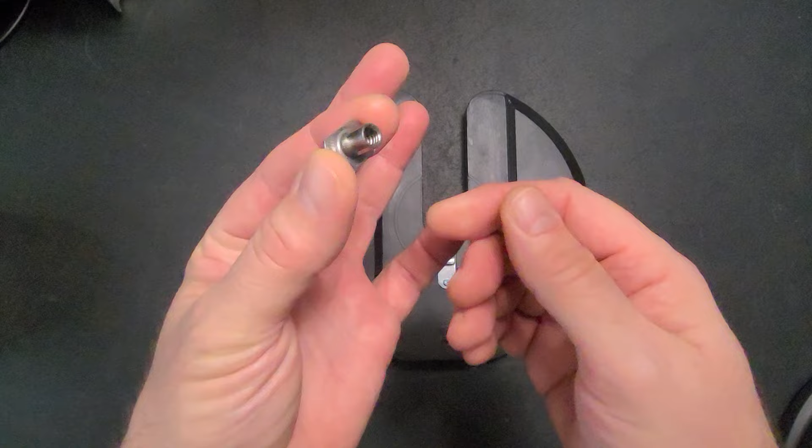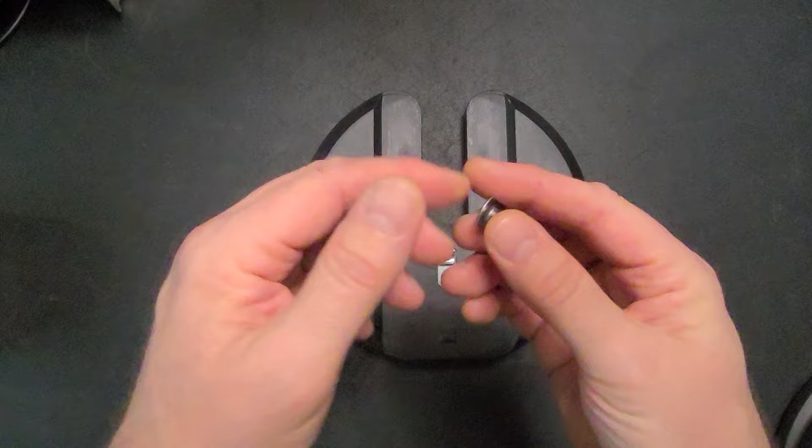And back then I thought I had a really great solution for it, and some people have used it with great success. But a lot of people were having trouble finding a key part of the fix that I had mentioned, and that is this weld nut. You can buy them usually in packages, but it's kind of hard to find them individually. So people had trouble finding these, and that made the fix not as accessible to some people, or they'd have to go spend more money on buying stuff in bulk packages, and they might not need them all.

So I want to show another method in this video. I should have shown it a couple years ago. I didn't, but I'll show it now. And hopefully it is a little bit more convenient and accessible for you guys. And I think you'll like the result better than my other fix.

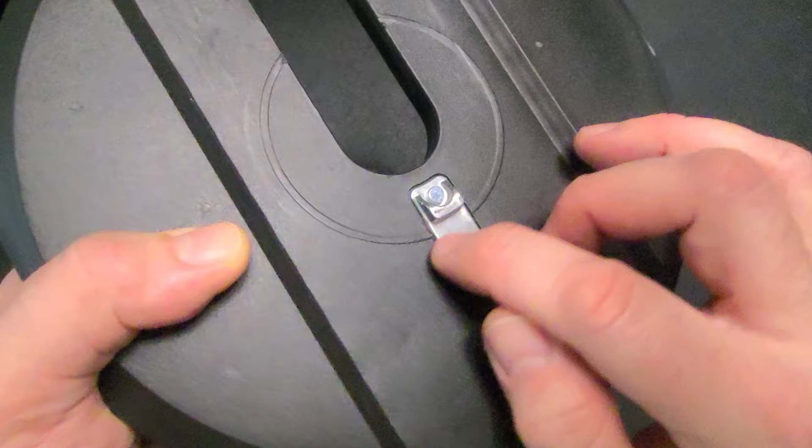But we're talking about how these tabs break on these plates. They're just kind of a cheap cast zinc or something tab. And they crack here. And this piece will usually come off, and you'll end up with pieces like that, where this used to go. Now, when that happens, of course, this tab no longer can hold onto the lip of the disc, right? So the way this works is that is how these plates are held into your dumbbell handle.

So in order to use them safely, you need to fix the tab, and you need a fix that's relatively inexpensive, but it's also very durable. A couple of years ago, I introduced this method. I used a bolt and a weld nut, just like this one. And it's a great solution. I still like it as an overall solution. It works, it's doable, and if you go back and look at that video, you can absolutely use this method if you want to, if you can get your hands on these weld nuts.

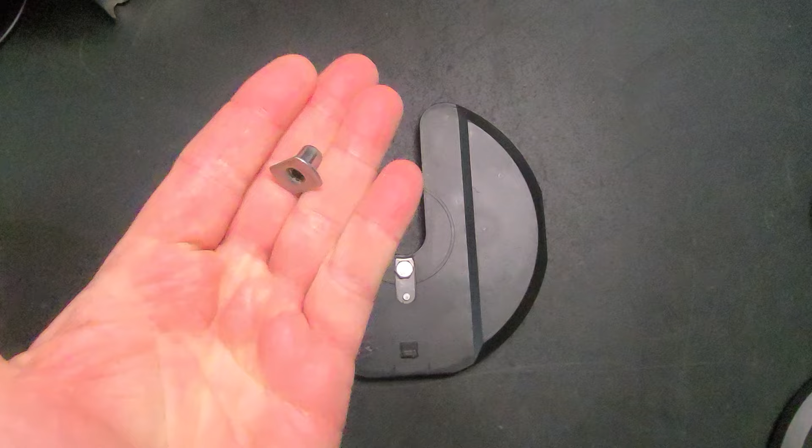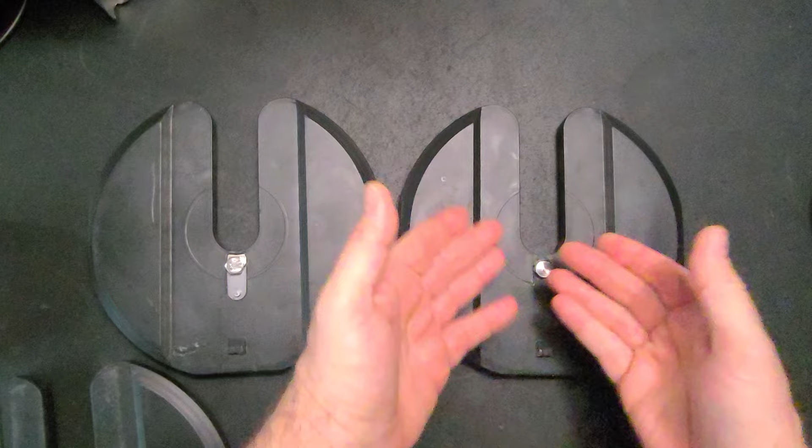But I made refinements, and I'll show you what I think is an even better result. This almost looks like it's a factory tab. And what I've done is I've modified the bolt to round the edges, make it a little bit more smooth. And it's loose in here because I haven't epoxied it into place yet for this video. And then I used an epoxy with pigment to make a filler for this portion of the plate, so that it looks pretty much like a factory plate.

The finish is really nice, and I think that even if your tabs aren't broken yet, this is a really nice mod to do to permanently fix all your tabs. This is not going to break. This is a grade 8 bolt. You're not going to have problems with this bolt. You'll destroy the rest of the dumbbell before you'll break this tab off.

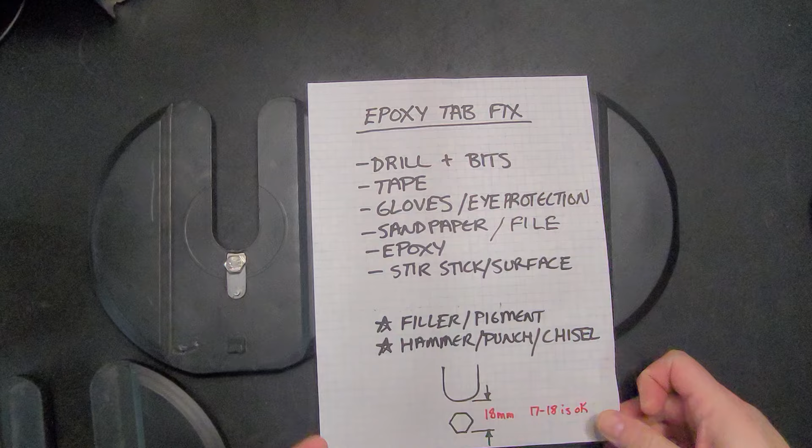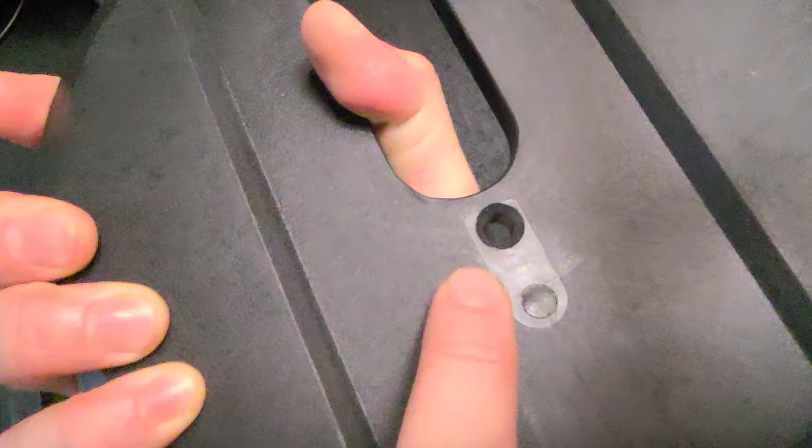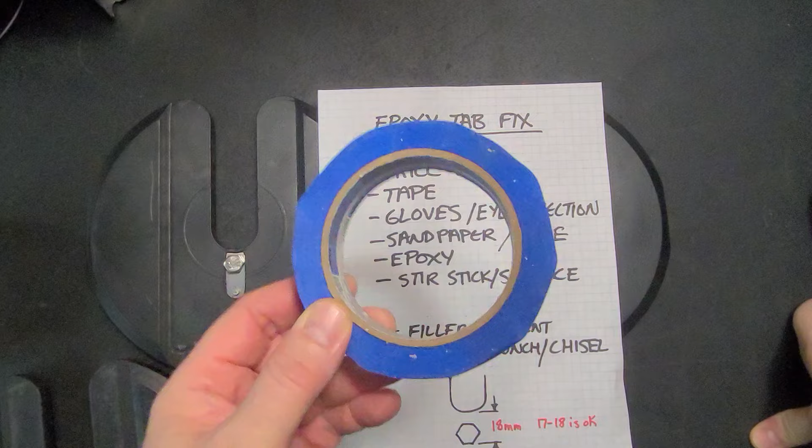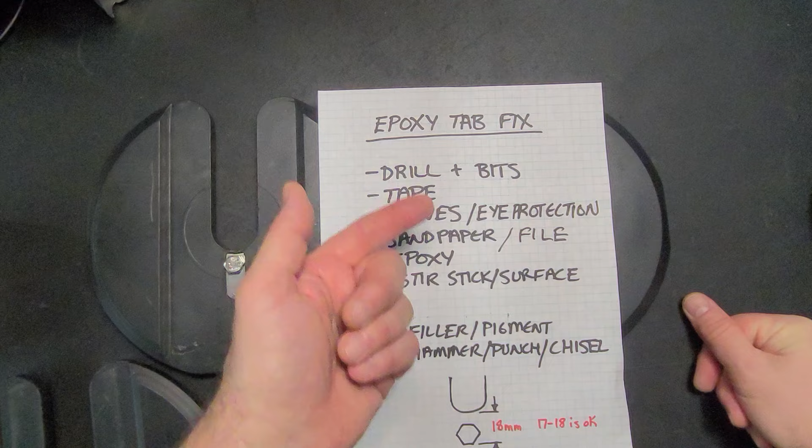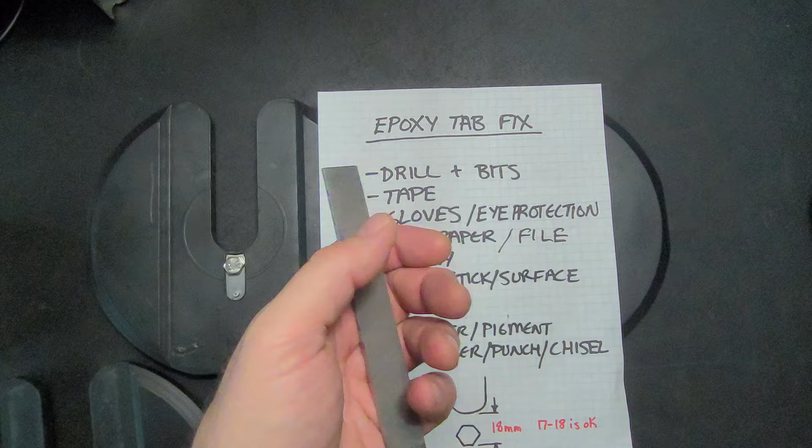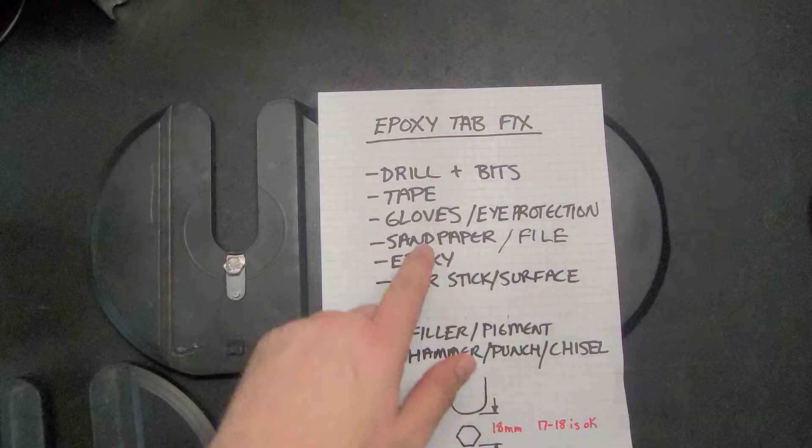And then you're going to need tape. You've seen me use this in many of my videos. I love blue painter's tape. It doesn't leave a residue, so it's perfect for the job. You're going to want some gloves for working with the epoxy, and some eye protection for your drilling. Sandpaper and file. I think this is a 0 file, but 0, 2, they'll work. And then I use something like 600 grit paper for modifying the bolt, and I'll talk about that after.

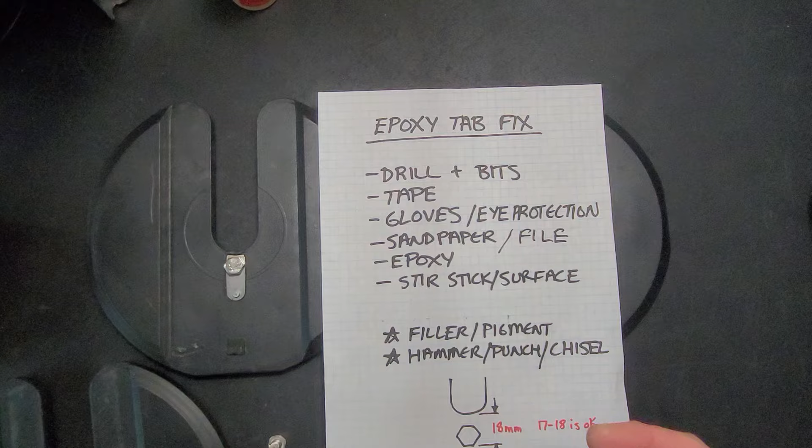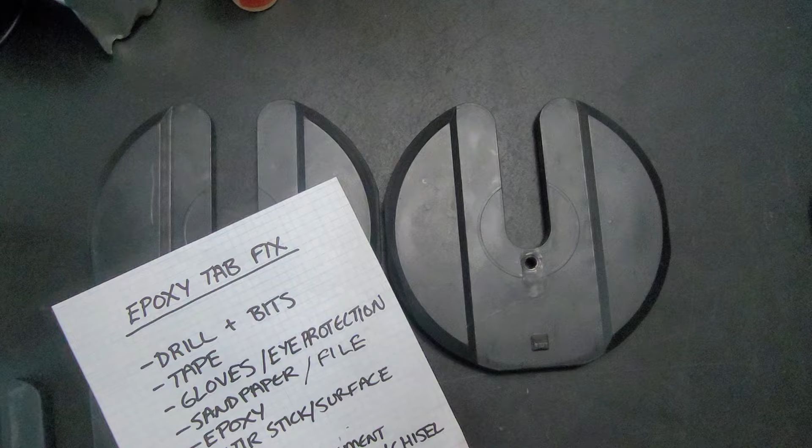And then epoxy, you've seen me use this in other videos. I use a 5-minute cure 2-part epoxy, but there are many out there. You can use a longer cure one if you want. And to color it black, just like in the last video, I use black iron oxide powder. It's perfect pigment. It's cheap too. It's about $10 for this massive bag of it. You won't need that much. I do other projects, so it comes in handy, but it's cheap enough that I keep it on hand as a black pigment. You'll need some sort of stick and something to mix your epoxy.

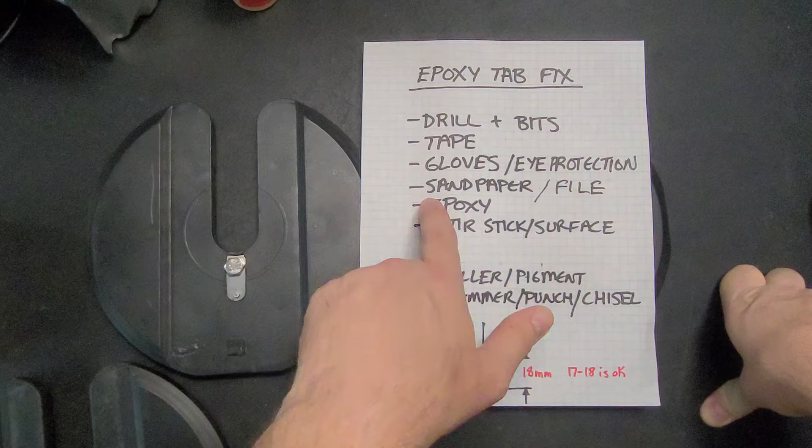Just use something that you can throw away. The filler or pigment is optional. That's why I've got a star here.

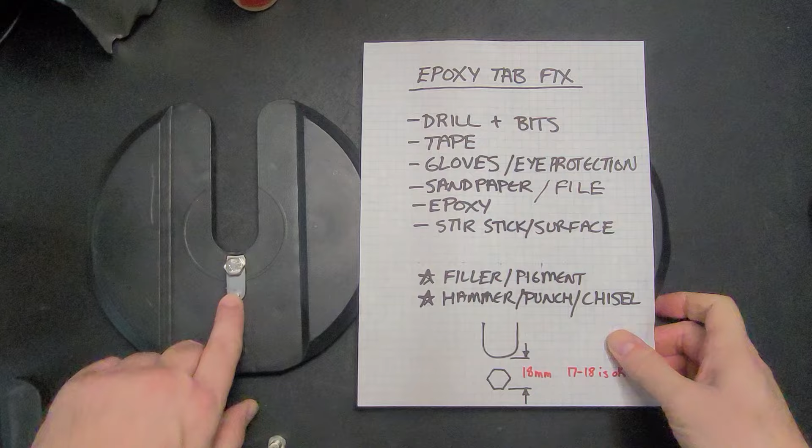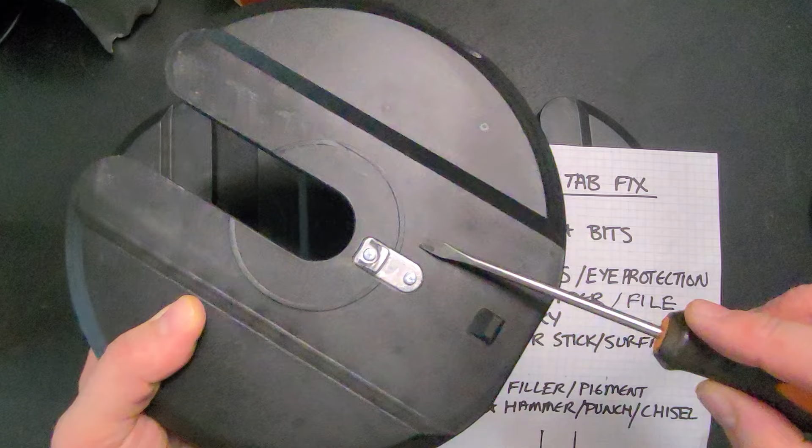And then the hammer and punch and chisel, that all depends on your situation. If you've got rivets that you need to remove, being able to use a chisel to remove that rivet can come in really handy. Or, you're going to ruin your screwdriver if you're doing it, but you could use a screwdriver in a pinch to pop these rivets. So that's it as far as the list.

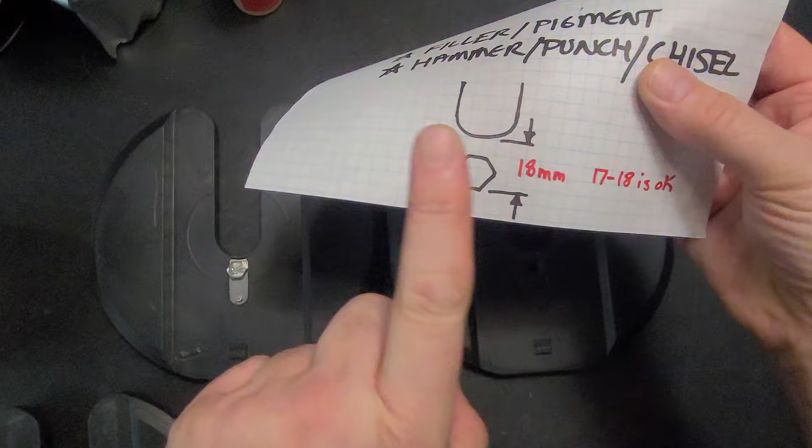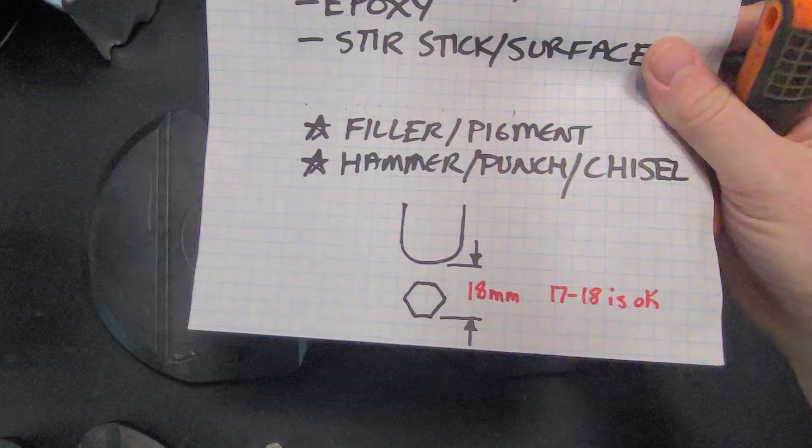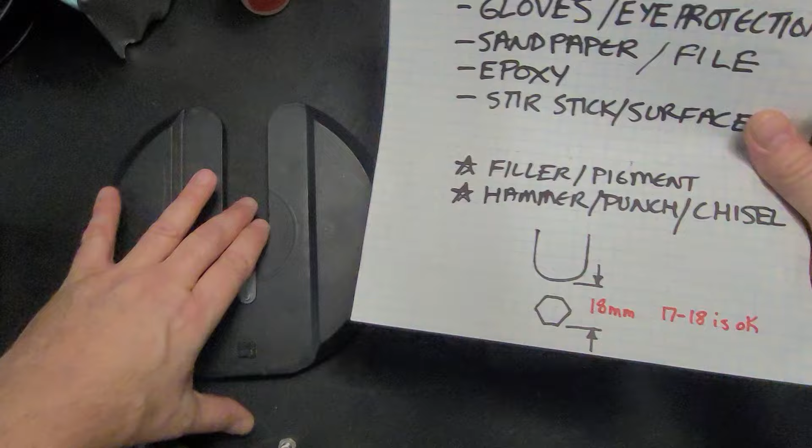And then the one important dimension to understand here is that from here to here is approximately 18 millimeters. So when you put your bolt in, you want the bottom of your bolt to be 17 to 18 millimeters. If it's 17, it's going to be a little bit loose. The plate will be a little bit loose in the handle. If it's 18, it's going to be just about right.

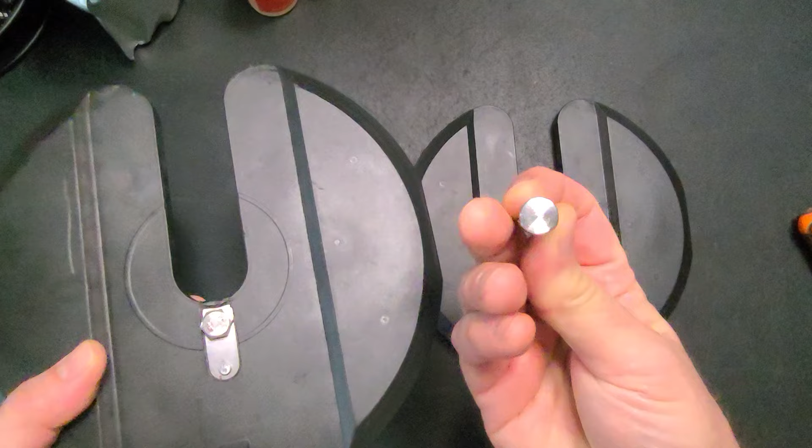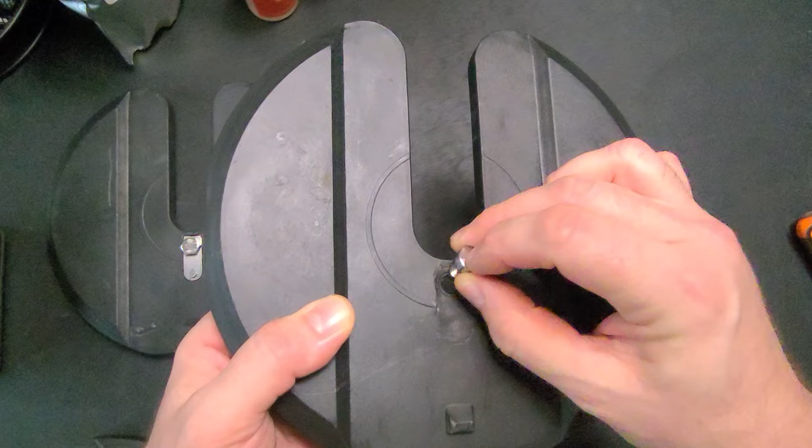And it turns out, and I talked about this in the previous video a couple years ago, that when you use a bolt of this size through the original hole, so this hole here, if you use that hole as your center for drilling, you get the larger hole in that position. When you put your 5/16 or 3/8 inch bolt into that hole,

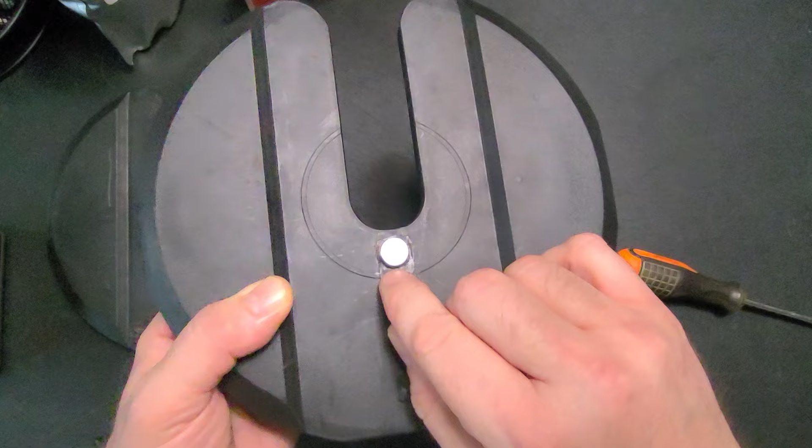as it turns out, this from here to here will be just about right. It'll fall in the 17 to 18 millimeter range, which is what you want. So this hole is perfect as the guide hole for drilling your bigger hole.

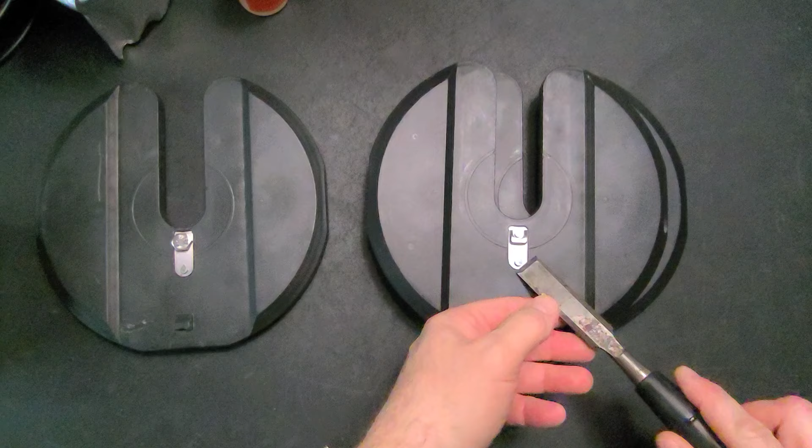Now, how do you do this? The first thing you're going to do is take off the original pieces if they're not broken off already. And again, you can do that with a chisel and hammer. Take off the pieces. You're going to be left with something that looks a bit like this. And I would recommend taking this rivet off. You don't have to, but I would take it off.

But you're going to be left with something like this, where this is the steel now of the plate itself. And then you can see the lip to the plastic covering. This plastic covering is a lip, and it forms a pocket that you can pour your epoxy into.

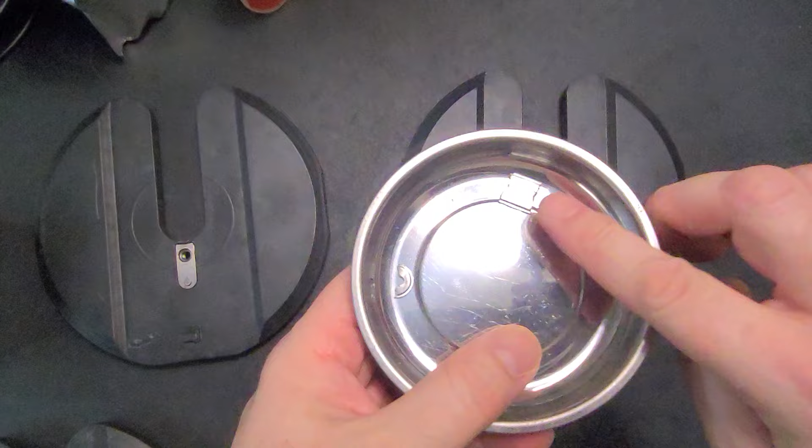Okay, so now that you've got your pieces off, you're going to drill your hole through that original rivet hole, in the correct size so that your bolt can slide. You don't want to have to tap it and screw it in. You want the bolt to slide freely into the hole.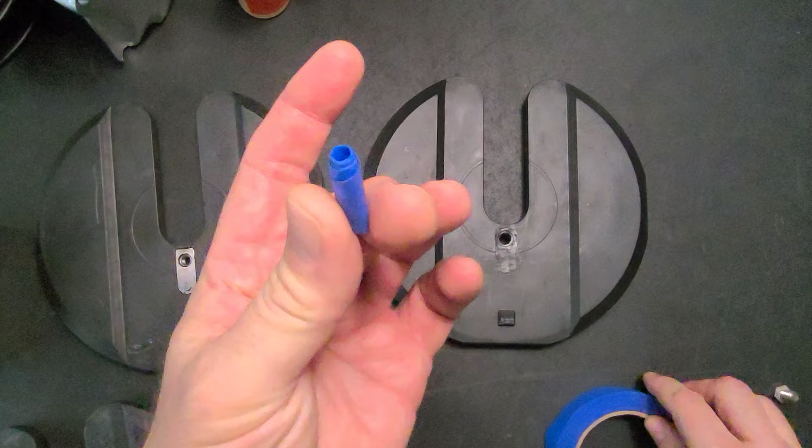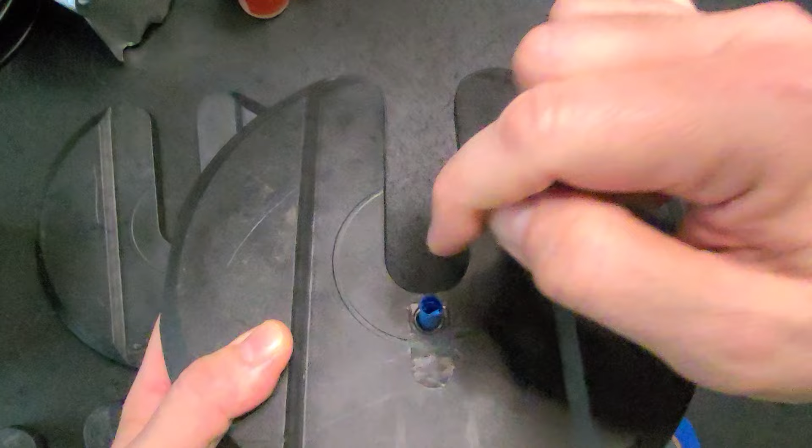Once you've got your hole drilled, the next thing is to grab your tape and roll up a tube that will fit in the hole that you drilled. That will keep the epoxy from going down into the hole when you pour it into here. So basically it'll look like that.

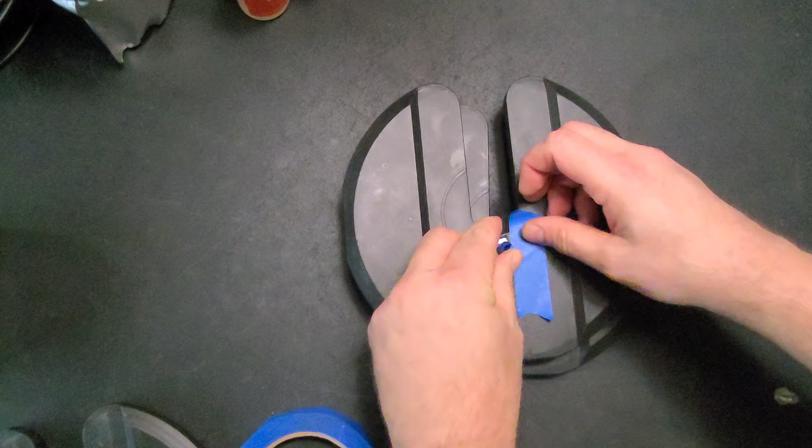Then we'll use this plate since it's got the steel still showing. You're going to put your tape alongside the pocket so that you don't affect the surrounding plastic, okay? You're basically looking to keep epoxy and sandpaper off of the plastic that surrounds the pocket. So basically like that.

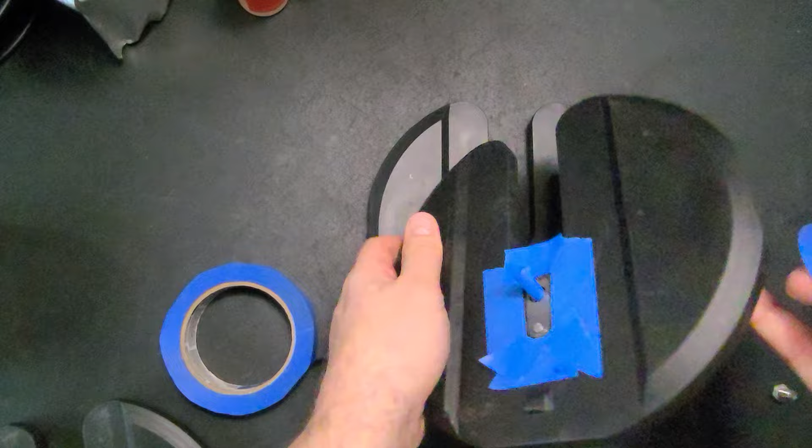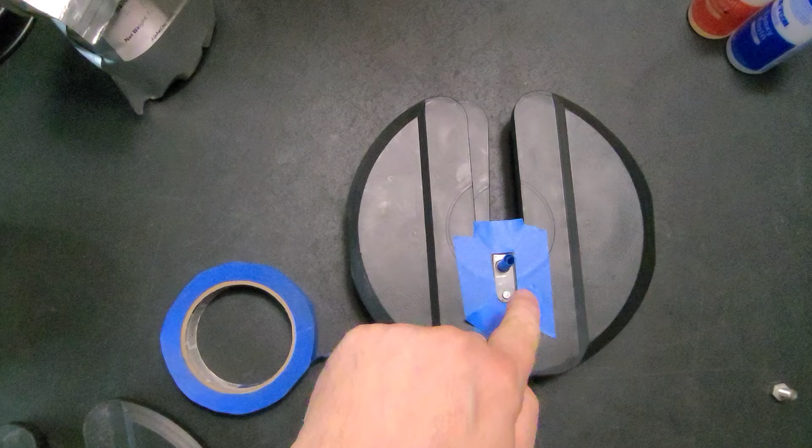Then grab 2 more pieces, and on the back side of the plate you're going to cover the holes that are on the back side. Now you're going to mix up your epoxy, and if you're going to color it with any kind of pigment, you're going to add your pigment filler to your epoxy and pour it into this little pocket that you've created there and let it begin to set up.

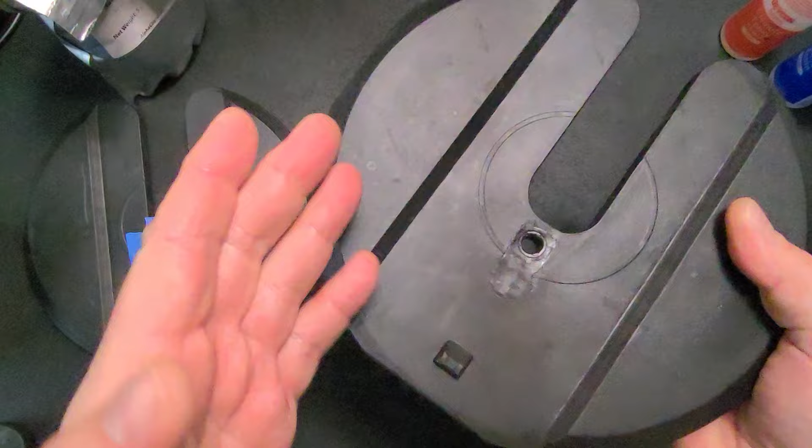Now, because this is 5-minute epoxy, in about 10 minutes or so, the epoxy will be nice and tacky to the touch. It'll feel a little bit sticky when you touch it. And that's perfect, because after you've poured it and it's sitting in there like this, you're going to use your fingers and just kind of push on it so that it takes the shine off of the epoxy, because when you pour it, it's really shiny. By taking off some of the shine, it makes it better match the surrounding plastic.

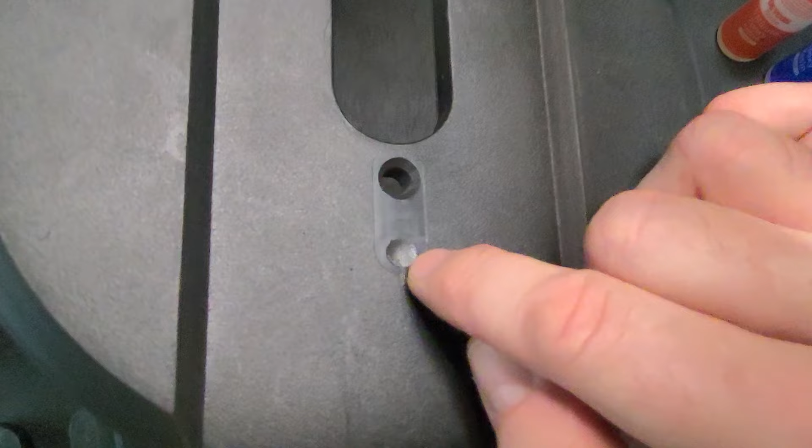And the other thing you're going to notice is that when you pour the epoxy in here, it's going to flow through and fill the hole where that other rivet used to go, which is great. It fills it in beautifully and it looks factory.

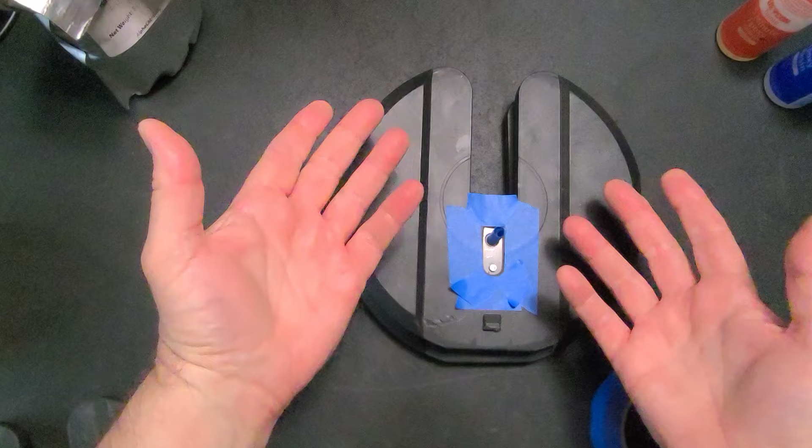So after your epoxy has cured, you can take your tape out. Now, this tape's not necessarily going to come out this easily. It's going to be a little bit stuck to the epoxy. So you're going to have to pull this out and then clean up the hole in here.

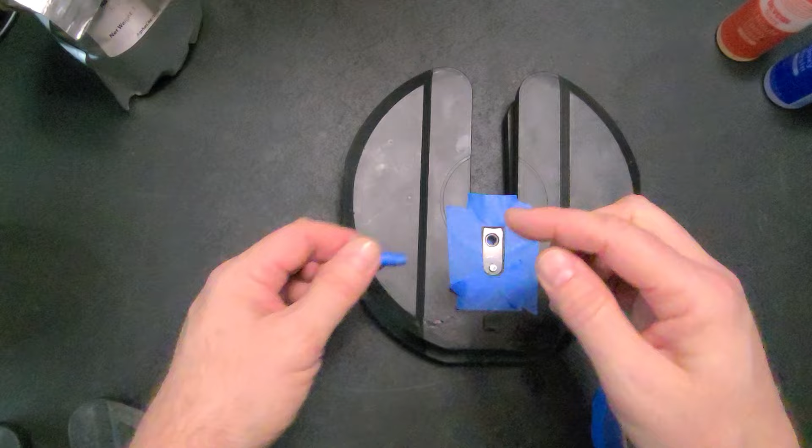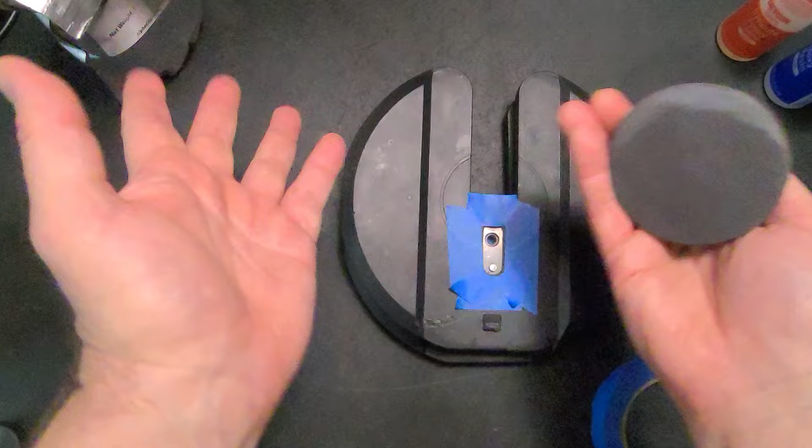If there's any tape residue in there, you might have to run a drill through it again to clean out any epoxy that might have made it past the tape. But you're basically going to clean up that hole. Then, if you want, you can sand. And you can do it by hand. You don't need to use a power sander or anything like that. But you can basically sand this area to, again, try to take some of the shine off of the epoxy.

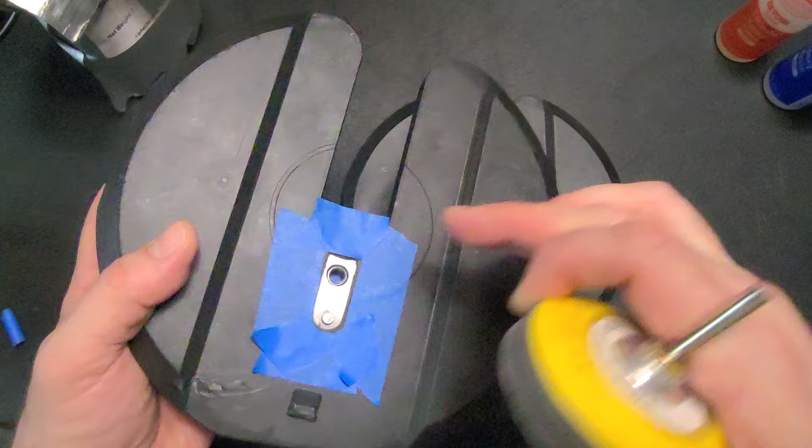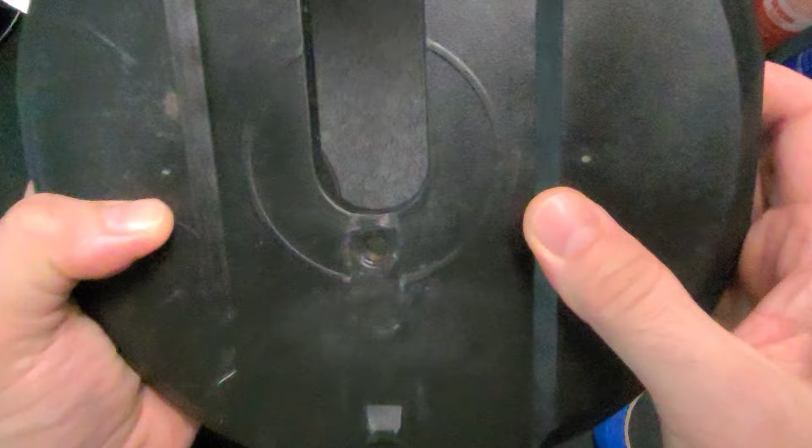The end result, after you pull off your tape, after 24 hours, it's all cured. Pull off your tape, and this is what you'll be left with. So then you want to clean up anything, if there's any excess anywhere, take a look. It should look pretty good like that. You can fill this later if you want. I didn't. I like the look of it with the chamfer and everything. It's up to you. Now, move on to the next part, the bolt.

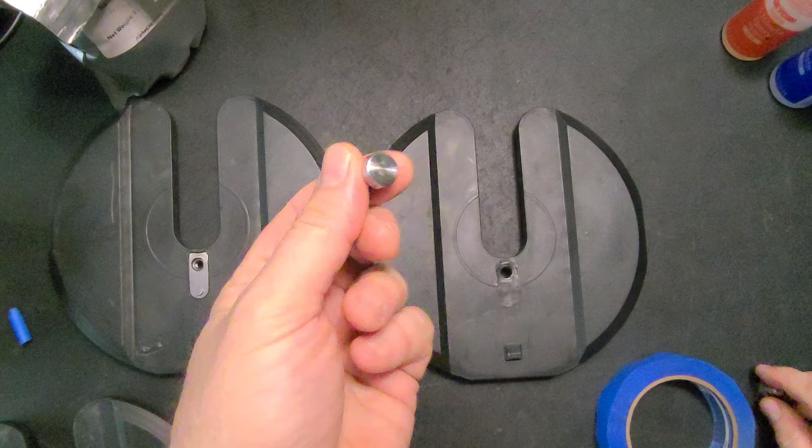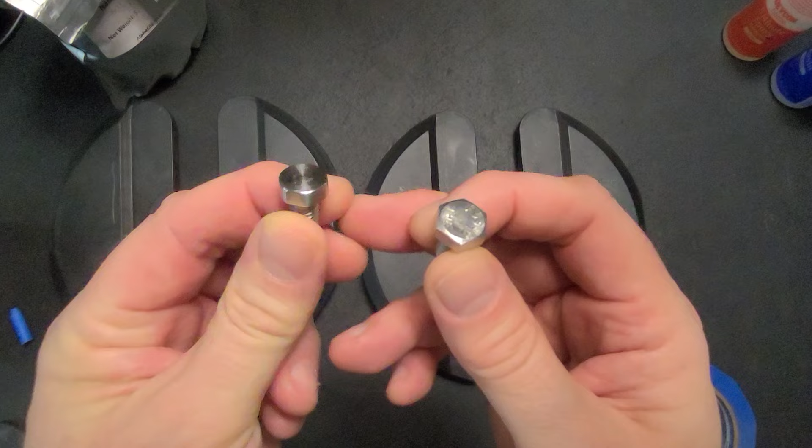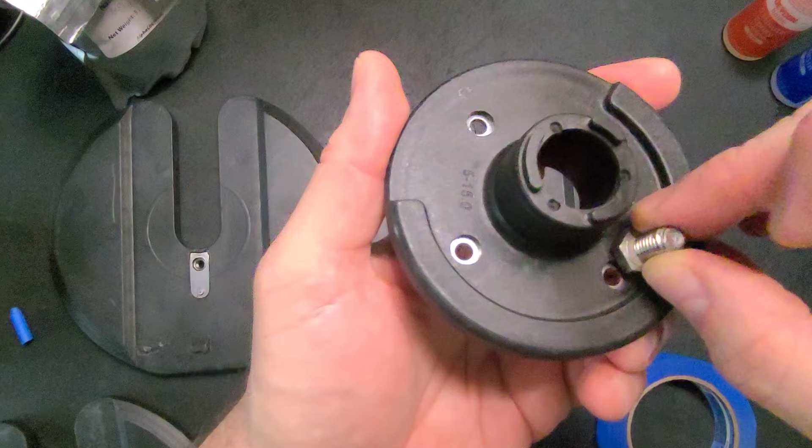Here's the original bolt. Here is the modified bolt. Now, why did I do this? One, it looks really nice. I mean, I love taking the lettering off and rounding the edges of this bolt, and it just comes out really, really nice. The other reason is these little sharp edges here, if you leave them, when this disc is riding on that bolt, you can see that the sharp edges are constantly riding. Every time you adjust your weights, it's doing that.

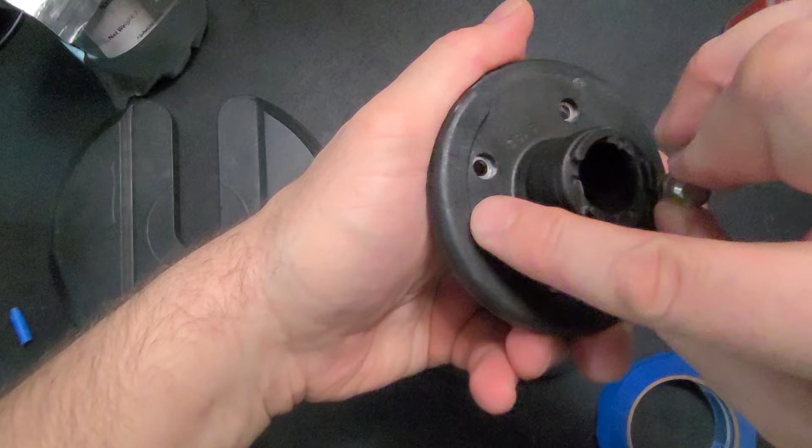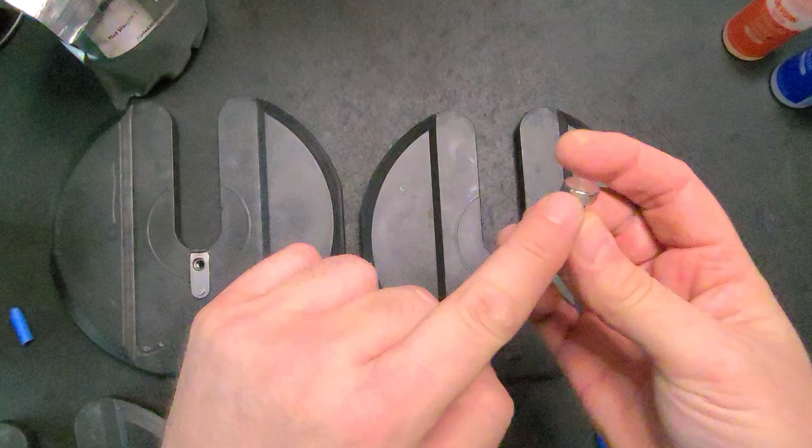By rounding the edges, you now have no sharp edges that are cutting into or in any way coming into contact with the lip of your discs. And it's the same for my discs, same principle applies. So it's just a nicer result. Okay, now how do I do this? You take your bolt before you even bother cutting it to length, okay, because you're going to cut it to length after to match the width of your plate.

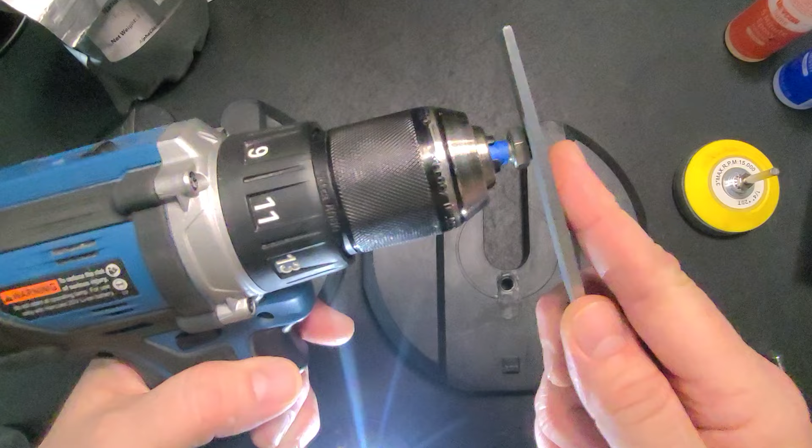So before you do that, grab some tape, put it around the threads to protect your threads. Grab a drill, put this in the drill, and using your file and your sandpaper, two things. To take off the lettering, to make this smooth, just use this right up against there like that. So as this is going around at full speed, you're going to have this file up against that face. And it's just going to file those letters off until you get a nice smooth result.

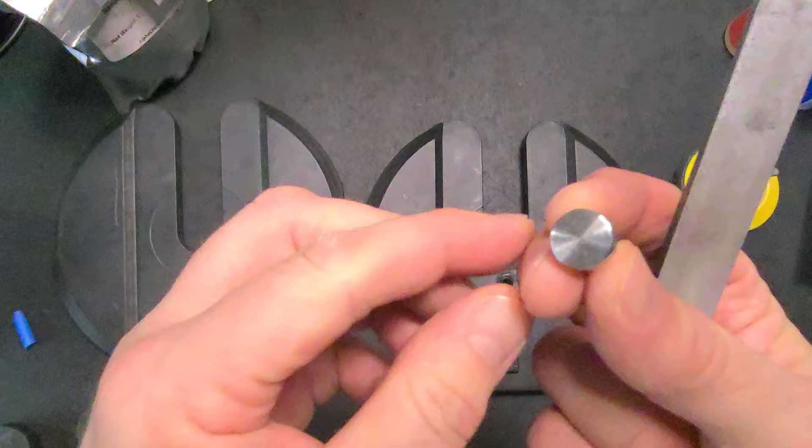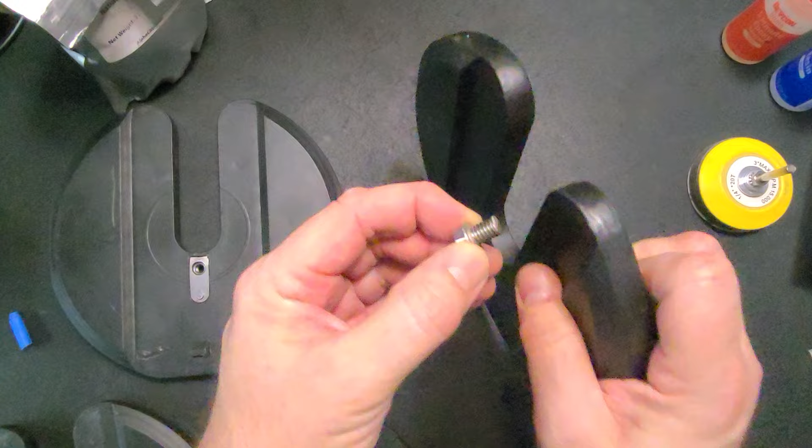Same thing for these edges. You're going to put this on here like that, but you're going to do it at full speed, of course. And you're going to file off the edges until you get that rounded result. Then, if you want to take off some of the marks from the file, you can do the same thing with your sandpaper here and your sandpaper there. And when you're done, you'll have that. Then you're going to cut this to length. How long? You want to go as long as this is thick, as long as it doesn't protrude past this thickness. So that's okay.

Once it's cut to length, the last step is to epoxy it into position here. Now, yes, you could thread it if you want and make it a removable thing, and then you could use thread lock on it. That's up to you. But like I said, the chances of you damaging this bolt, you'll ruin the dumbbells before you'll ruin this bolt. So you can epoxy this and just be done with it.

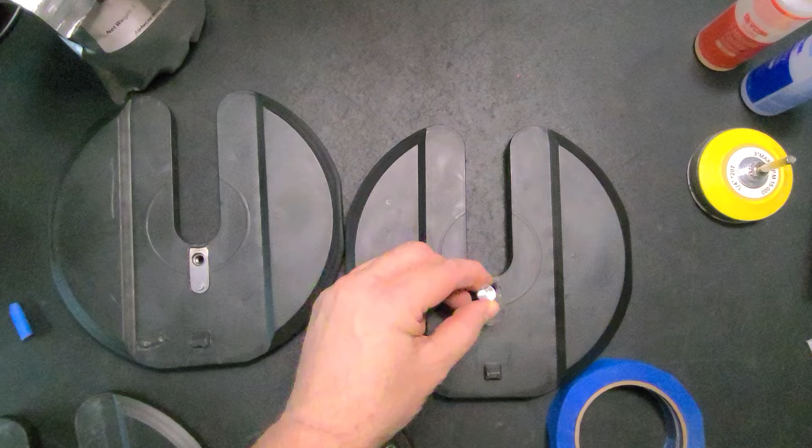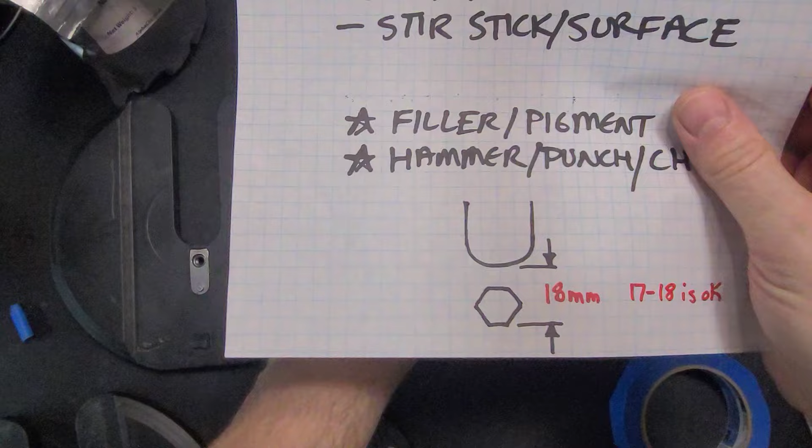So you mix up your 2-part epoxy again, apply it to the threads and in the hole. If you want, you can put some tape on the back here to keep the epoxy from getting onto the surface below. Put your bolt in. Make sure that the bottom of the bolt is flat, pointing down, just like in that photo, and let it cure for about 24 to 48 hours. I'd go a couple days. There's no reason that you can't let it cure for a couple days, but after 24 hours, it really should be usable. And then that's it.

That is the finished product, and I think it looks great. It doesn't require you to go find these, which is fantastic. And now this bolt is a little bit more friendly than the other bolt was in terms of, you know, the way that it slides on the discs. So yeah, that's it, guys. Hopefully this will be the last tab video. I promise. I don't see any other reason to make any other tab fix videos, but I think that this is probably the nicest outcome for these fixes, and it's worthwhile if you do this proactively and just get rid of your tabs, and as you have time, do it to all 20 of your plates. You'll never have a tab issue again, and it'll look great.